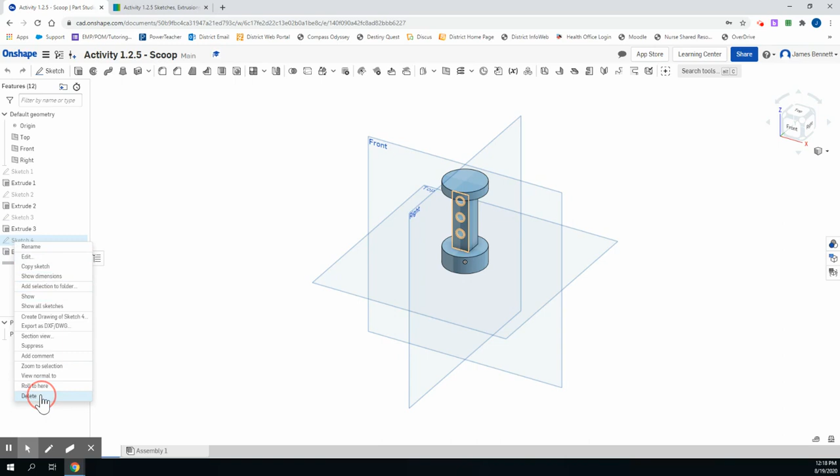Going back to our original shape, we remember that we had the holes here. Now each one of these represents a through hole, but we need to change this to a scoop. Because of this, these shapes no longer help us. So I'm going to right click on the sketch and I'm going to delete it. I'm also going to delete this extrude. Notice that it's highlighted in red. That means there's an error here. That's because there's no longer a sketch for it to extrude. So I'll delete.

We're going to create a new sketch on this surface to create that semicircular hole. I'm going to go to Sketch and select the face, and then I'm going to go to my front side view. So we're doing our sketch here. Now in this scenario, we're going to create a few pieces to make sure things work correctly. First, I'm going to create a line that follows the center.

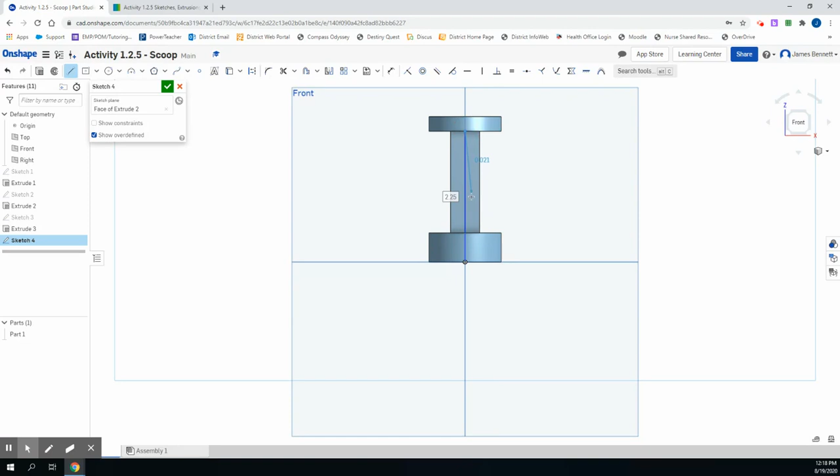This line simply needs to be in the middle, and it only needs to exist. I'll hit right click and escape line. So we have a line here. Again, this line only needs to exist. It doesn't necessarily do anything yet.

Now that we have this line, we're also going to need to create some circles. Using the arc tool, I'll be able to draw a semicircle. I'll put both points that I need on the line, and then I'm able to move it. I'll do this 3 times, each time placing 2 points on the line and then dragging it out.

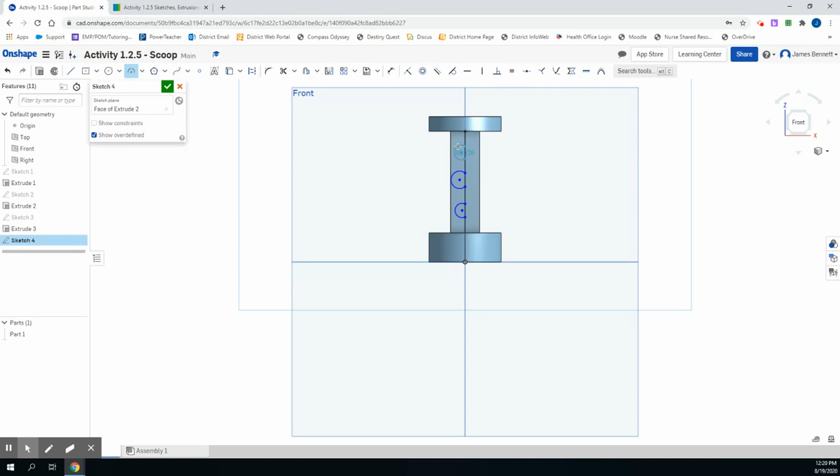Now I know the size of these has to be 0.25 if we recall from our original shape. Or if we go back to review the directions for the assignment, we'll see that this should be 0.25. Therefore, we're going to use a radius of 0.125 to accommodate the 0.25 diameter. I'll go to my dimension tool, select the outside of the shape, and make it 0.125. I'll do the same here.

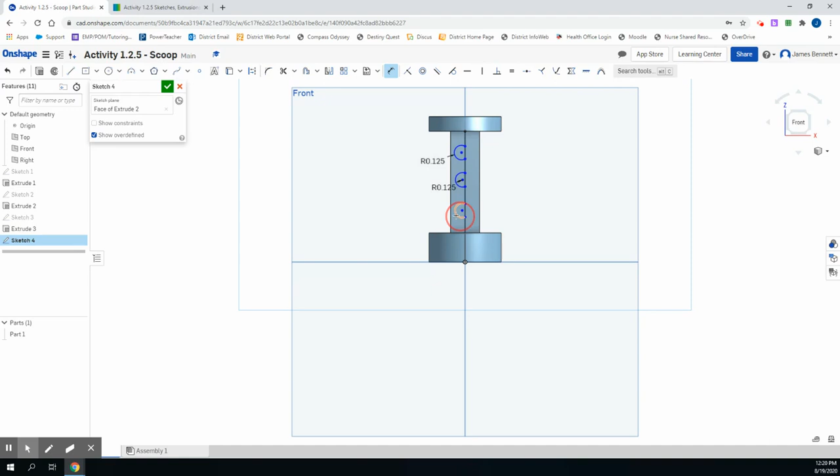Now I need to make sure that the centers are in the correct positions. So I need to dimension again. Center to the edge is 0.5. And then center to center will also be 0.5.

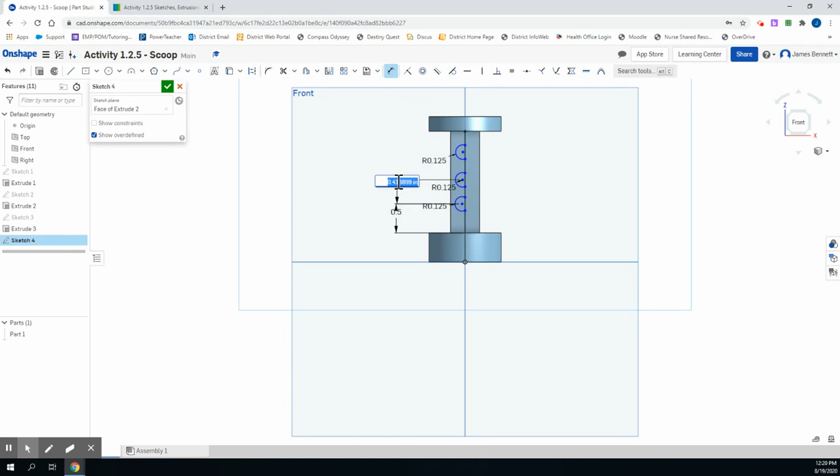Now our lines still don't look quite correct. This is because we need the center of all of these to be on this line. In order to do that, I have to get a point on line. I'll select the coincident constraint, choose the point, and then the line. Line and point. Line. Oh, made a mistake. We'll escape the constraint. Line and point. And line and point. Right click and escape coincident constraint. Now all of these should be identical.

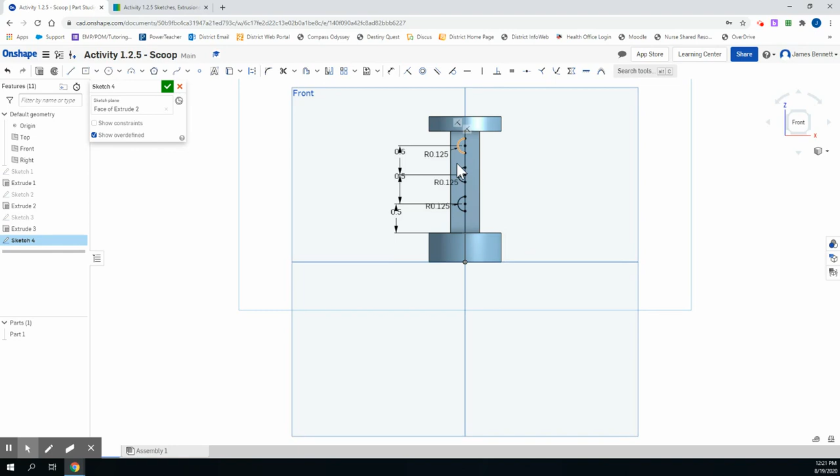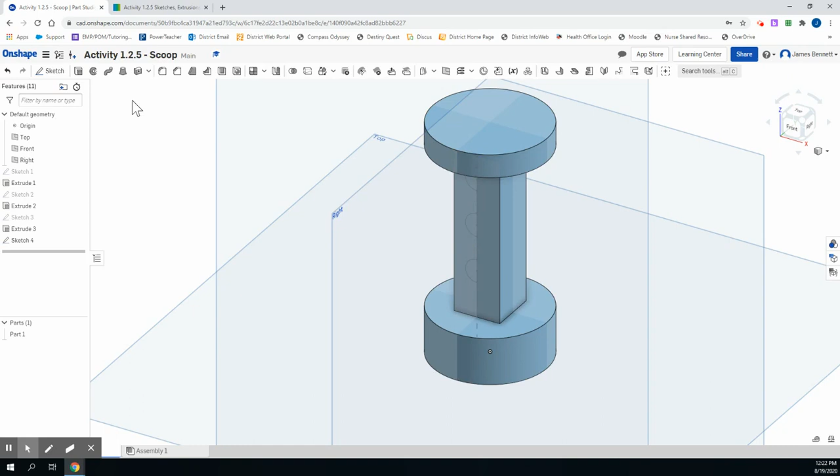I'll confirm. Now that we've confirmed, you see that we have 3 shapes that we need to extrude, but with an extrusion we would only cut a hole. The tool we'll use again will be the revolve tool. I'll go to my isometric view. I'm going to use the scroll wheel to zoom in to get a closer view, and I'm going to use revolve. First I'll select the face. For each one of these, I'll select the semicircle. Notice that I could select multiple faces, but I want to make sure I get the correct face.

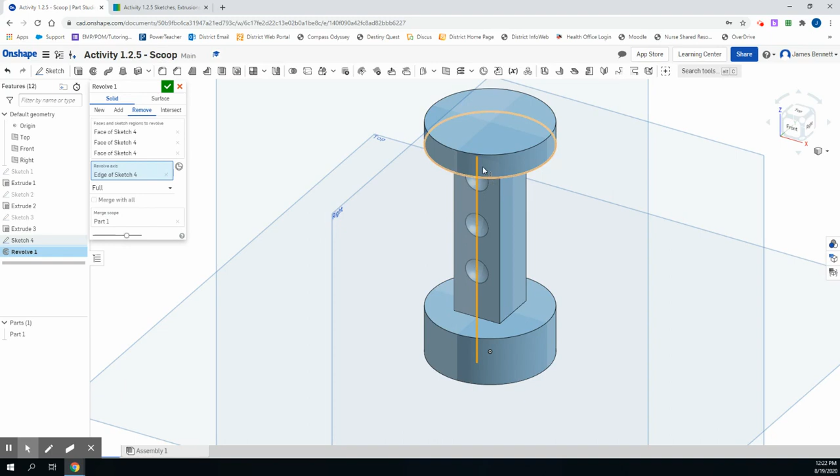Next, I need to select the axis. That's the line that we originally created. We've been using this line for each of these. Now going back to our original diagram, I see this should go inside, but right now it's being added. This is still an additive method. I'll select remove to make it a removing method. Now I've cut a semicircle shape or a partial sphere out of each of these. I'll click to confirm. Our solid model now matches our figure.